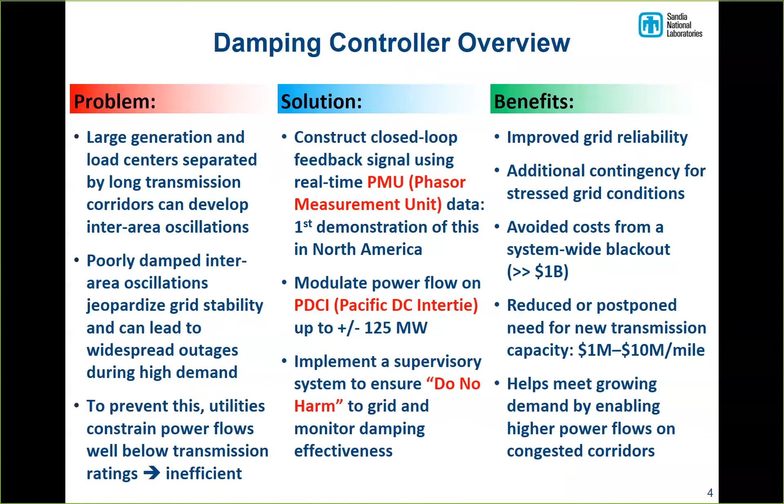So here's the event that really was the genesis of the project way back in 1996. And this is about a 10-minute time series of power flow at the Oregon-California border, basically going from north to south through the AC corridor there.

And it was a day in August of 1996 when there was a heat wave in Southern California, so there was a lot of air conditioning load, and so a lot of power was being transferred from the Pacific Northwest, where you have lots of cheap hydropower, pushing that through the AC corridor down to Southern California, Central California, the Bay Area. And that put the grid in a case where the damping, in this case 7% damping, is not real good, but at the time they felt that that was okay.

And simultaneous with that, in the Pacific Northwest, there's a storm going through. And it knocked out one of the major transmission lines, and that caused, as you can see, a momentary instability, brief, for 15, 20 seconds or so. And the damping got even worse, and then it was able to recover from that. The grid can handle at least one contingency.

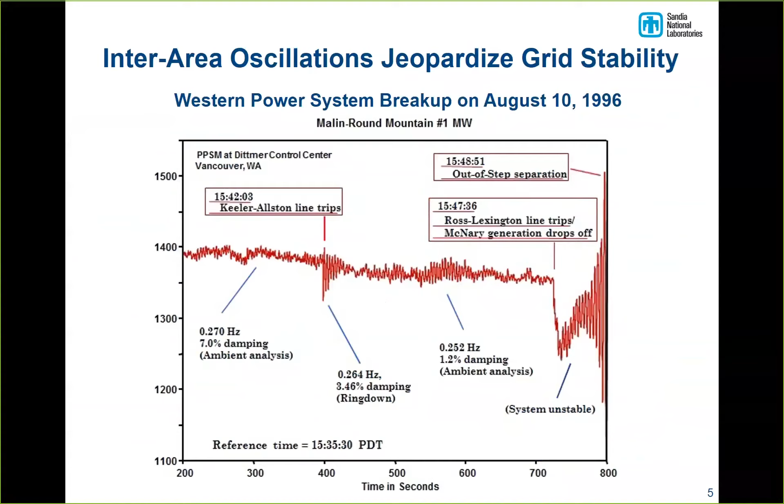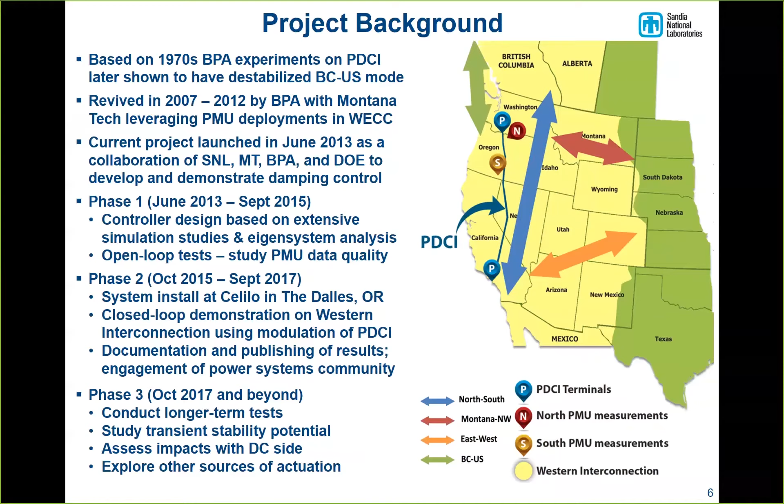So here's an overall graphic of what the controller looks like, and just a block diagram. So the damping controller itself has three components to it. There's the real-time control, and the real-time is what does the calculation of the feedback signal. It takes in the PMU data, computes the feedback control signal, and sends that to the PDCI to modulate the

power on the PDCI. Another part of it is an asynchronous part, which is slower than real time, and that includes the supervisor that is supposed to ensure do no harm, and it also includes the GUI, the operator interface, that tells you what's going on, and there are some settings as to what PMU data you're going to use, and so that's where the operators can interact with it.

There's also a faster than real-time part of the damping controller. Anytime you're going to implement a critical system, something that's going to be deployed in real time that you don't want it to fail, or if it does, you don't want it to do something damaging, you really need to monitor the local, the device itself, and make sure that the hardware is functioning correctly.

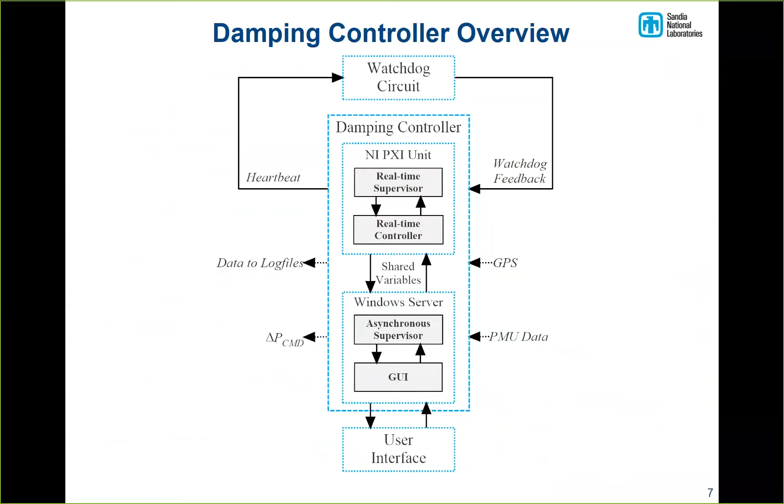And so we have what's called a watchdog circuit that keeps probing every part of the control system, including the connection to the PDCI, that says it's alive, I'm doing fine, and if any of those drop off, then the controller needs to be gently disarmed so that there's no spurious signals injected into the grid. And it also includes, of course, you'll see a picture of it in a moment, the red panic button. That has to be there too. So that's a block diagram of the controller.

So how does the controller then interface with the rest of the grid? And that is what this diagram shows. So the dashed lines are everything that you just saw in the damping controller. And outside the dashed lines is the rest of the world. So the PDCI itself, the northern part of the PDCI is in a place called Celilo Converter Station. It's in a city called The Dalles, Oregon. It's right on the Columbia River and very scenic spot near Mount Hood.

The southern end, as I mentioned, is in LA. So we were at the northern end. And BPA owns and runs that Celilo Converter Station. We interface directly with the commanded power that is going onto the PDCI. And that is denoted by this P scheduled. And so our commanded power simply sums into that.

And that is the net signal that is sent to the PDCI controls in Celilo and produces the DC power, the command that will convert the AC power that's coming in and convert it to DC to go down those 850 miles. And then to LA, where it gets inverted back to AC and dumped into the grid. And so this is the grid, and these are your disturbances. We have PMUs, north and south, that we use for our feedback.

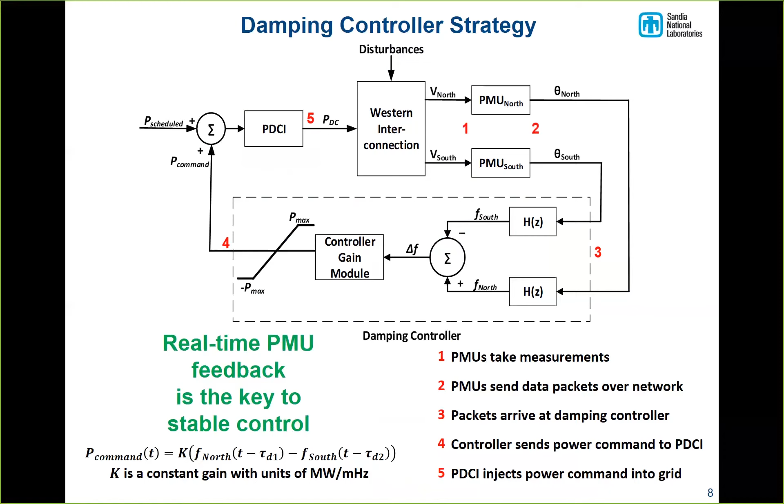And the controller has a GPS, so when the data comes in, I think most of you know that PMU data has a GPS timestamp, the controller has a timestamp, and so it's comparing the two, and based on that, it knows what the delay is. If that delay gets outside a certain bound, it doesn't use that data, because that data is old. And we have more than one PMU, as this graphic shows, and the reason we did that, actually the term came from Dimitri, he wanted diversity and redundancy.

Diversity means geographical spread. That is, you've got more than one site or location in the grid where you're getting the PMU data from. So that way, if at one location there's a problem, a communication problem, and it goes out for whatever reason, or it's just under maintenance or something, you've got others you can go to. And redundancy means it's sort of a sanity check on your PMUs.

If you've got two PMUs at the same location, each, say, on a different part of the complex of a substation, you compare them to each other, and they better be giving you the same information within some very small delta. If they're not, that tells you something's just not right there, because they should be agreeing. And if they're not agreeing, don't use either one of them. Go to a different location. And you might not catch that if you didn't have the redundancy part of it. So every location that we're using has two PMUs, and that gives us additional checks to make sure the control signal that we're going to inject is getting real quality data.

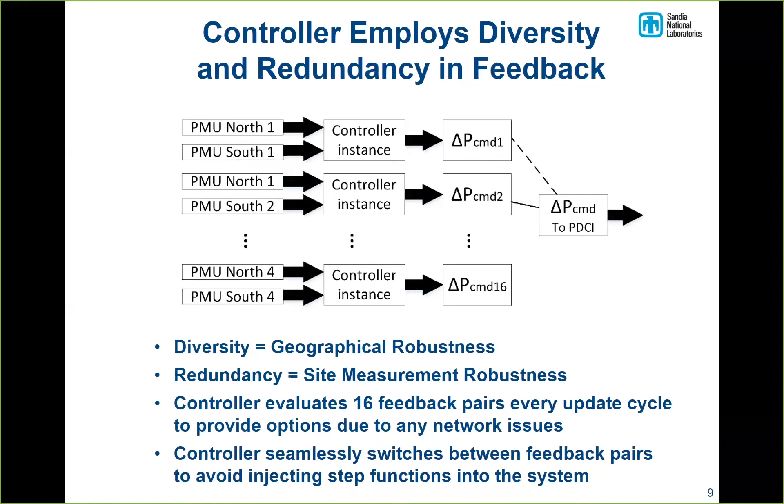And we do this using bumpless transfer. And the reason for bumpless transfer, if you're familiar with it, is just to make sure that you don't have a dramatic switch in the value that you're injecting into the PDCI. In other words, we don't want to put a step function into the system, which could produce some unsatisfactory results.

So a little bit more on the supervisor, this do no harm part. It has 3 parts to it. The watchdog is the faster than real time, implemented in custom hardware that we designed and built at Sandia, and that gives us the local monitoring to make sure that everything is working fine. The operator can hit the emergency button and the controller will disarm.

The real-time part reads in all the data and checks. We've got a lot of different flags. If the data isn't good, or if there's something going on in the grid, I think we're up to 18 flags, and that may go up more. It's like ANDing all of them together. If any one of them says this isn't good, you drop off. You disarm the controller. And then the controller implements the bumpless transfer, as I said, as it goes from on-off mode so that you don't put a step function in.

And then finally, there's the slower than real-time part. And not all of this is actually implemented yet. What this is intended to do is automated probing, which is going to tell us what other modes are doing on the system to make sure that we're not doing any harm to any other, like I showed you, east-west mode, Montana, northwest, BC, Canada, or Washington mode. We want to make sure of everything else that is going on in the grid. And the best way to do that is just to have automated probing right there at the location. Now, we don't necessarily need to do that, but that's a fail-safe way to do it, or a safer way.

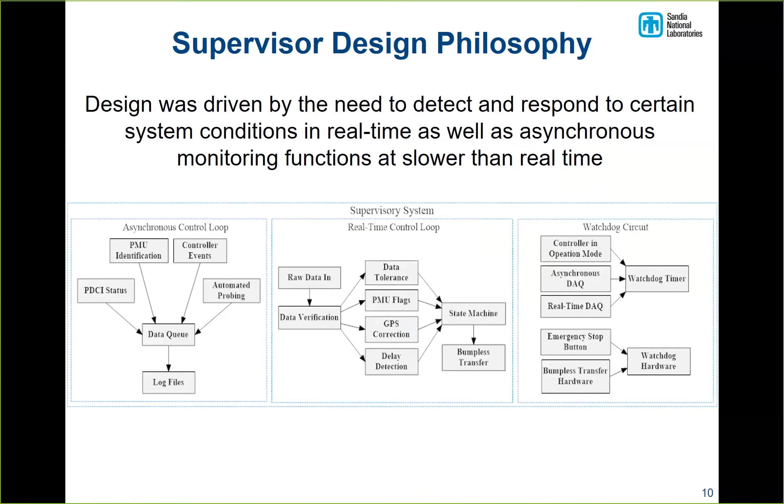BPA made fun of us for that. They said, boy, you guys wanted to make sure we knew where it was and what it looks like. You must think that we wouldn't know otherwise. But yeah, we always want to make sure that that's very recognizable. And we gave them the keys to the car, too. Which, yeah, you've got to have the keys to operate it.

So that's what it looks like, and it's implemented at Celilo. It sits there right now. It is not actually operating on the grid. It's in what we would call a standalone mode. So it's taking data, and it's computing what it would do if it were connected to the grid. So we can always get this data and look at it and analyze, well, what would it have done to the grid? And so that gives us a good analysis when events happen.

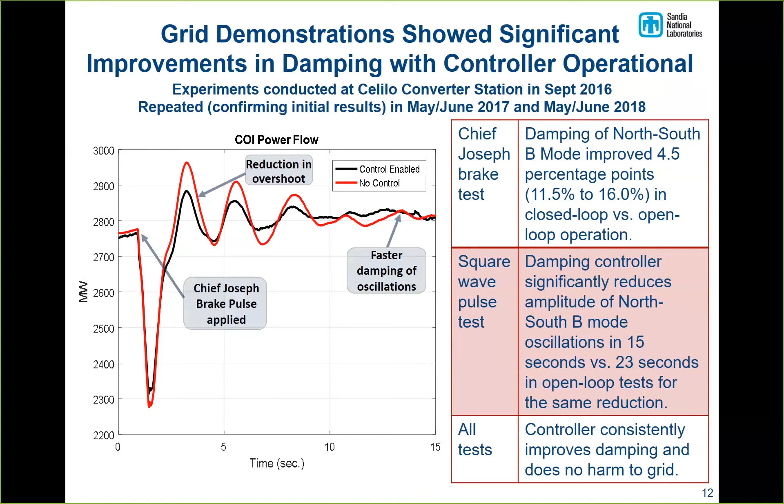We've gone back several times since, and we've redone those tests in addition to doing new tests, and the gain in improvement is very consistent. And we've tested this consistently in 2017 and again in 2018, and the results are very consistent, confirming that it is improving damping a significant amount, and it also is a dependable kind of improvement.

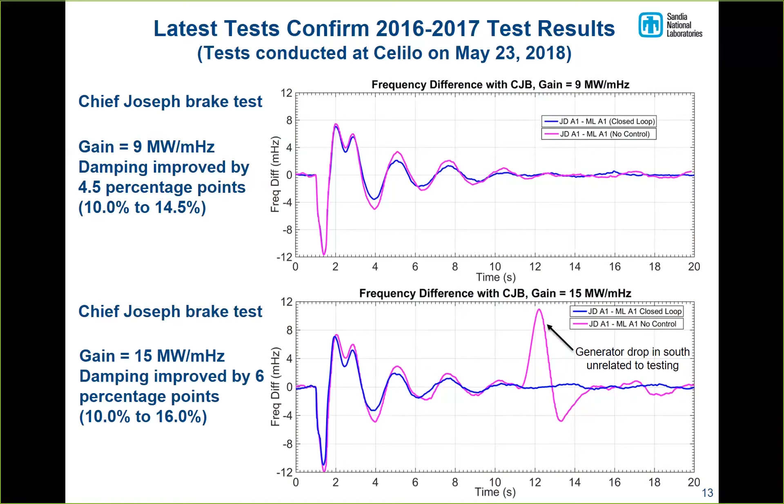When the operator's looking at it, it's like, did we just do that? And said, no, we didn't do that. That's not us. It was somewhere in the south, unrelated, just happened to happen. I could say more about it, but I won't.

Anyway, so the other thing we want to do is to figure out, well, what's our best gain? Now, we don't have an adaptive gain, so we don't tune the gain online. That's something Dimitri has asked us to consider, and we'll probably use some kind of gain scheduling. But we needed to figure out offline what kind of gain; we don't want it to be too high. If it's too high, then we're pushing the DC part too hard.

And the reason we needed to do this is that finally, in May and June of last year, we kept asking them. We said, what we really need to do is what we call a walkaway test, where we're not there for 6 hours and then pack up, go home, and disconnect it from the grid. But it'll run for a month at a time without us there. And it took 2 years of testing before they finally gave us permission to do that. And we had a 4-week test, and that's why we need to know what the gain is, because we're going to set that gain and leave it there.

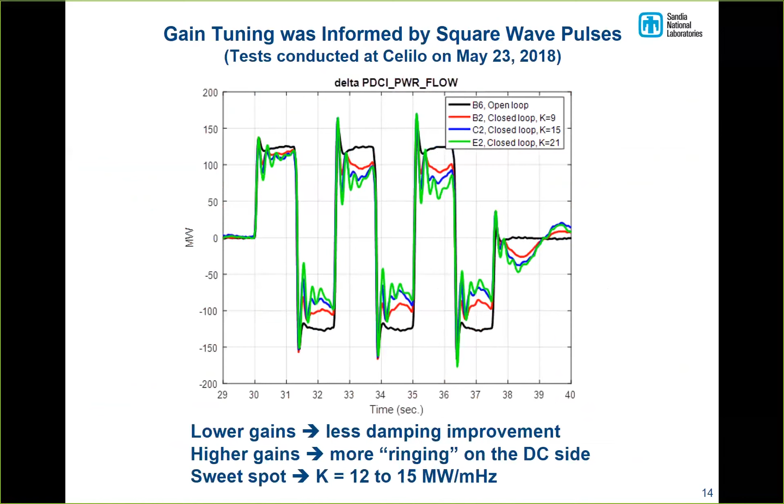We did some other tests. I won't say too much about this on forced oscillations. I don't know if you know much about forced oscillations. These are oscillations that are induced on the grid. They're not a natural part of the grid. They happen because of some event, not necessarily a dramatic event. It could be like a valve issue at a hydro plant. And the frequency of these forced oscillations can be anywhere in the 0.1 to 10 hertz or so. So it covers a wide range.

We don't do anything in our controller for the higher frequency oscillations, but at least we wanted to show that we can improve a 0.4 hertz forced oscillation. So we asked them for permission to do a forced oscillation on the grid, and they said, "What? You kidding?" And so no, we didn't get permission to do a forced oscillation. The one we wanted to do was from Grand Coulee Dam, and that meant getting permission from Bureau of Reclamation, and that was just too much to coordinate, so we didn't get it. So we did something locally with what's called the probing signal generator.

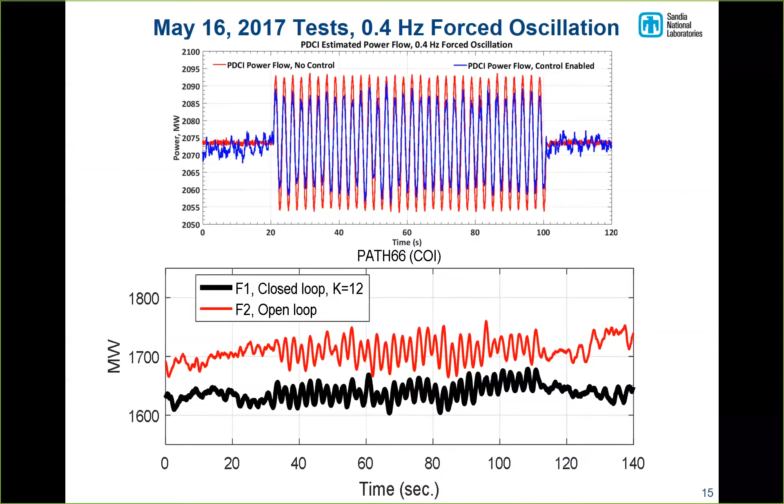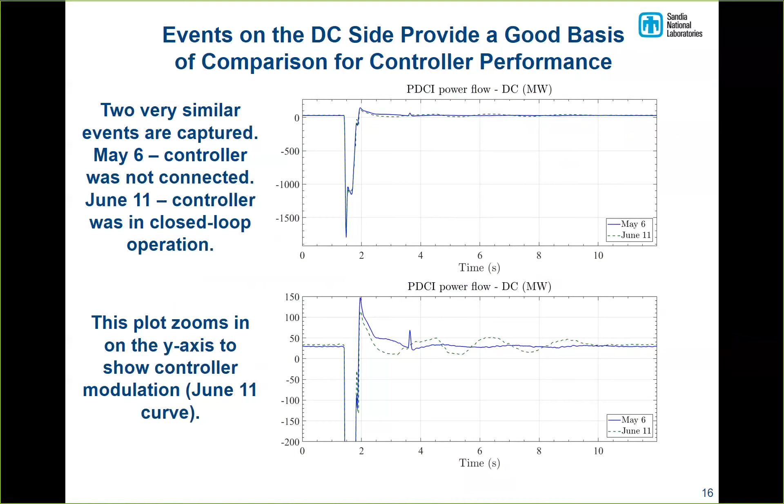And so the damping controller, as I said, performed as it should. We wanted to make sure it didn't get confused or anything, so no problem there. That's all this plot is showing you. So we felt pretty good about what the controller was doing for the test that we were able to perform.

The PMU delay is really a function of the manufacturer of the PMU. How wide is the window over which they take data to get the measurement that they're sending out? And of course, that's a moving window. And typically, it's 40 to 50 milliseconds. It depends on the manufacturer. Some cases, you can change settings.

The communication delay is the one we care about the most. That's the delay from when the PMU sends information to when the controller gets it. And that was very low, 16 millisecond mean, and it didn't range very much. It only went up to 40 milliseconds, which is excellent. I say it has a heavy tail, so it's not like a normal distribution. Since the mean is 16 and the low is 15, obviously 40 is a heavier tail.

But 40 milliseconds is a very low delay compared to an oscillation of 0.4 hertz, 2.5 seconds. Just for instance, if you had, say, a 500 millisecond delay, that's 20% of the entire period. That's 40% of the half cycle. You're almost out of phase injecting your control signal. You can actually make it worse.

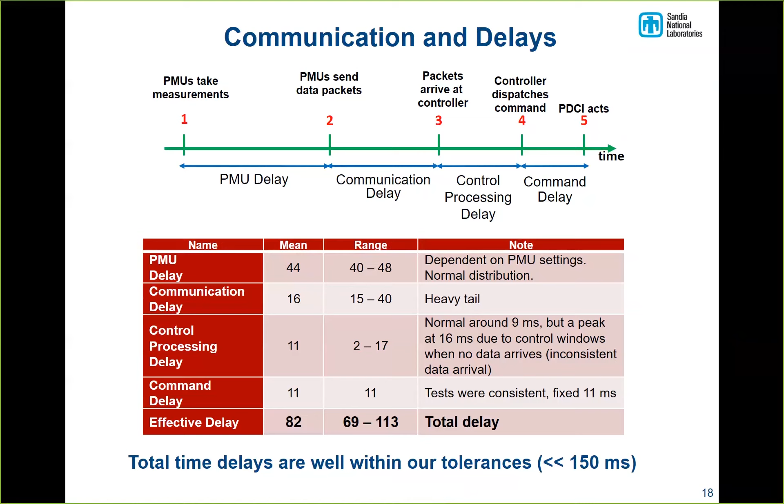And the data quality was excellent. BPA's network is a sterling network. Not every utility can afford that kind of a network, but just to give you some idea, that was one of the best networks in terms of data quality, consistency, and low latencies.

That's not the only thing that can go wrong, though, using PMU data in a feedback loop. You can have inconsistent delays between the packets. It's supposed to be 60 times a second the PMU turns out data, so every 16 milliseconds you get another data packet. It's not quite that good. It can vary some, and that was a little bit of a surprise to us. We were thinking it would be pretty consistent, but it's not, which means you might get 2 packets in one update cycle and 0 in another.

And so that can affect the frequency estimation, because we're determining the frequency from the phase angle, when you don't have consistent data arrival. So that was something that we needed to address. And so what we concluded is that the do no harm commandment takes priority over everything. And that told us that without any question, we need time alignment.

The packets in the north that we use in the feedback signal and the packets in the south have to match within a very, very small range. They cannot be from, one is from 16 milliseconds before the other. Even that small of a range, we said we need the delay to be consistent. We have to have and enforce time alignment. And so that was critical to the controller.

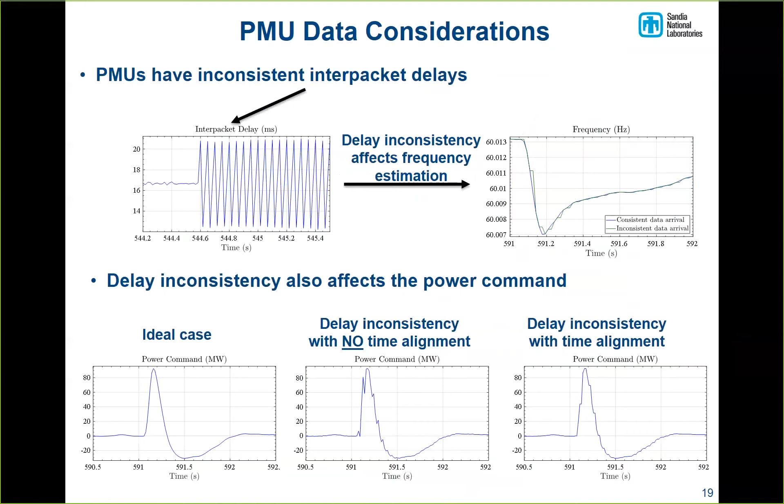And so that's what this means here. North and south have to have the same PMU timestamp. And the supervisory system makes sure that everything is time aligned. And if the data is too far apart in time, then the controller is disarmed. Now, we have more than one PMU. As I said, we have 16 PMU pairs. So that gives us some margin of error. We can switch to a different one.

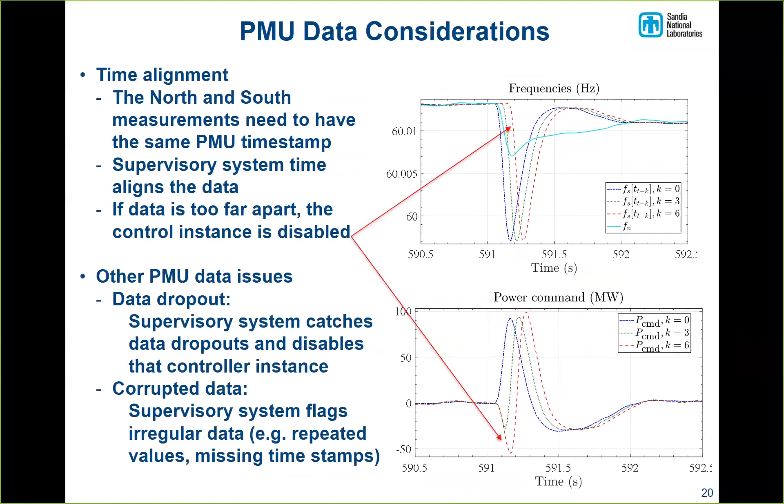There were other issues where the data just doesn't come in. Again, the redundancy, diversity helps. This almost never happened on BPA's system. Other utilities have reported that this happens more often, where there's no timestamps, or you get the same value 2 cycles or multiple cycles in a row. So we have a flag for that that says, no, this is too close together. That can't happen. That's a definite glitch. So again, that helps determine whether we switch PMU pairs.

So I'm almost done here. That is the PDCI damping controller, which we implemented in hardware. I mentioned way back at the beginning of the talk that we got co-funding by Imre from the energy storage program. You may ask, well, you didn't use energy storage here. Why would he fund this?

Well, because going forward on the grid, energy storage, utility scale batteries, you won't find much of that on the grid right now. The belief is, and the expectation is, that costs will come down, the value proposition out of energy storage will become more obvious, and so the case can be made that people will start putting energy storage at different locations on the grid.

So this is sort of a fake Western grid here, where the diamonds are the energy storage sites that don't now exist. So we did this in simulation. And what we wanted to do was to figure out, well, how much improvement in damping can we get if we have one energy storage site? How big does it need to be, and where does it need to be to damp the north-south mode? We did a study on that. You need 20 to 50 megawatts, and it needed to be pretty co-located either in the north or the south.

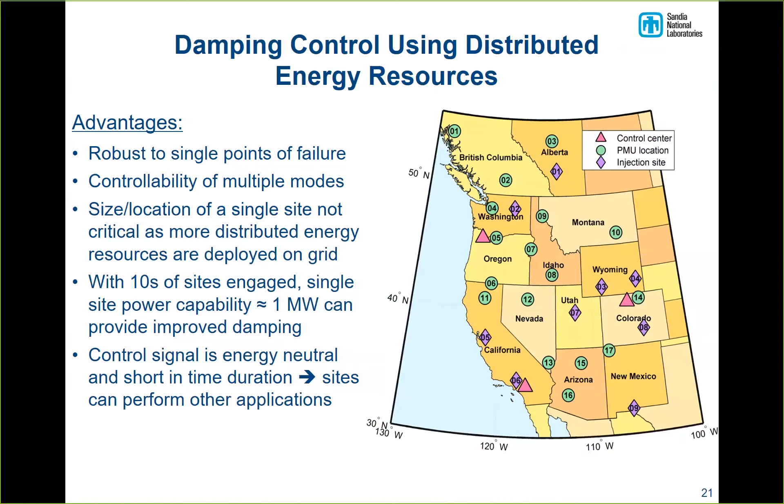And none of these sites need to be that big. They could be maybe a megawatt of storage. And with a bunch of these engaged, you can actually improve damping. You need to coordinate it. We didn't quite get to the algorithm for coordination on a grid scale level, but we're still going to investigate that going forward.

And this is just a quick example that we did in MATLAB. And this is a pole plot that shows all the different modes, or different poles in this case. This is the east-west mode, and you can see the damping improved quite a bit from having these sites. This is sort of a static heat map.

I was really impressed with the display you guys have. I guess that's on this floor, yeah, it's on this floor. And that had that real-time heat map that showed the frequency variations. That was pretty cool.

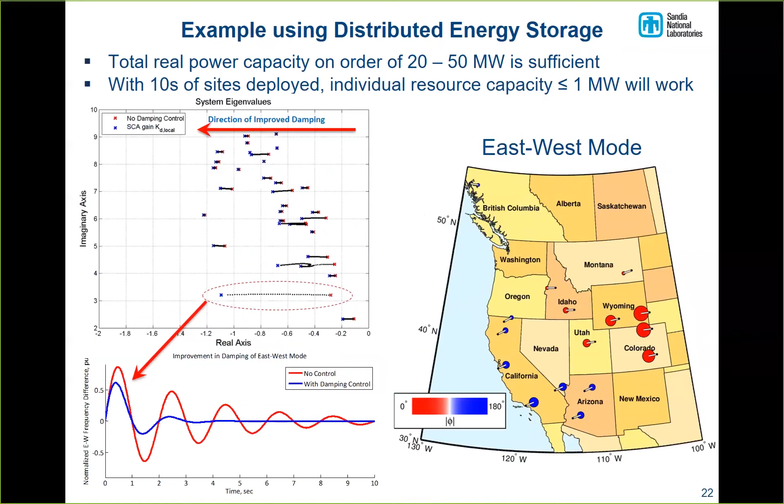This is a static map, but it can be done in MATLAB. And we actually distributed this to a bunch of Western utilities. And it shows red, blue, oscillating against each other, 180 degrees out of phase. The size of these circles is proportional to the participation of that site in that mode. And the sticks coming out of it are the phase angle. And this is the last slide.

Well, I have a couple conclusions, but I can wrap up here. We also wanted to do a proof of feasibility study. And Sandia has a wind facility in Lubbock, Texas. And we wanted to see, well, how about modulating the torque for the wind turbine? And could we do that and possibly improve the oscillations on the grid? And the only issue here is that Lubbock, Texas is not in the western grid. It's actually in the eastern grid. It's not in ERCOT, although it probably will be in a few years.

And we took some PMUs from different locations. And for this experiment, we didn't have the great fiber optic network BPA has. We used public IP. And we did that on purpose because we wanted to see, okay, let's not use bad, but let's just use a normal network that's not that good. Is this pie in the sky?

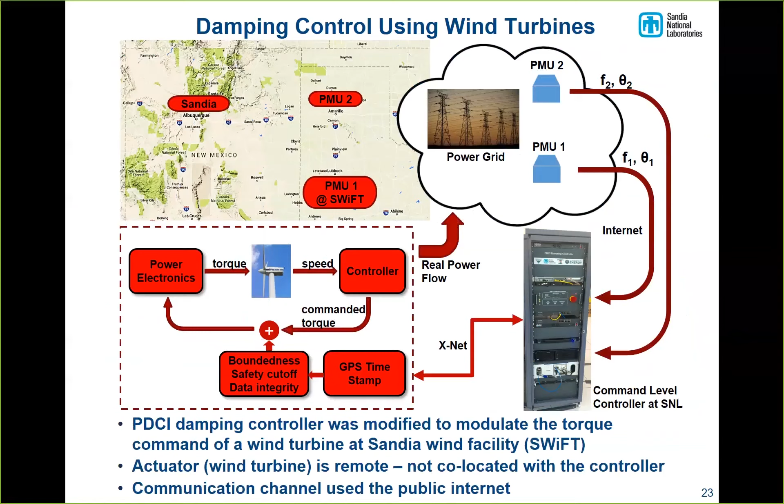Well, it turns out, in terms of the delays, it's more, and there are some more data issues, but you can still do real-time control to modulate the torque from Albuquerque to Lubbock, getting PMU measurements from other places not co-located with either one. So it's proof of feasibility because, well, Albuquerque's in the western grid, Lubbock is in the east, so you're not actually controlling a real mode. Just wanted to make that clear. So that was a small, quick feasibility study, and it's very encouraging that this can be done with wind.

So overall with the project, it's the first time in North America that PMUs have been used for real-time feedback control. We've designed the controller so that it isn't just a one-trick pony that only works on PDCI and can't be used on wind or energy storage. Indeed, you can. We made no hardware changes for the wind case, so we were able to use it as is. We have a do no harm supervisory system, which we have to have, and that's a good lesson for everybody if you're ever working on a really critical controller in the field, that you've got to have something like that.

We did a whole lot of background work before we were ever allowed to test, so we have lots and lots of what I call eigensystem analysis tools and visualization tools. I just showed you one, and models, like a two-area model that you might just do in MATLAB. We have one that uses the Power System Toolbox, a third-party toolbox for MATLAB, and PSLF. And these go from just a couple buses on up to 18,000.

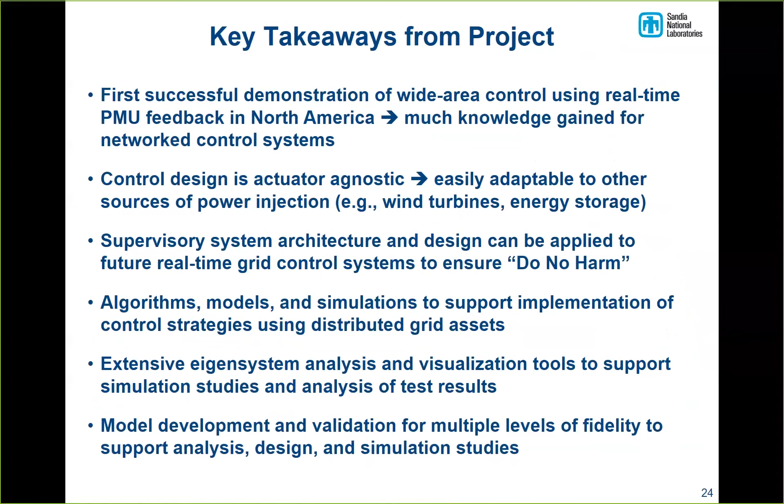We won an R&D 100 award for this project in 2017. If you haven't heard of R&D 100, well, Elu has won 2 of them, I believe. And she just won one just this past time. We won one the year before. We've published, this number has grown already, so we're in the 20s now on publications, more journal papers. We did file a patent a year ago. It's still pending, and we have been pursuing commercialization of this.

BPA said, this is great, but we want to buy it from a vendor. We don't want to have to call Dave at Sandia and say, it's not working right, you come out here and fix it. They want a vendor with an 800 number and 24/7 service, and we don't do that at Sandia. Actually, in a few rare cases, one-of-a-kind things, we do. But BPA said, can you find a vendor for us that will do this?

And so we're looking, and we've talked to several vendors and applied for a DOE fund to move it from, it's been proven, we've got something that works, we've tested on the real grid, now we need a vendor so that you can just pick up the phone and order it, or go on the web and order it. And that's the next stage of that project. They have a couple companies to talk to, Schweitzer, ABB, and for future research, we're doing transient stability. That's the big thing that we're working on now.